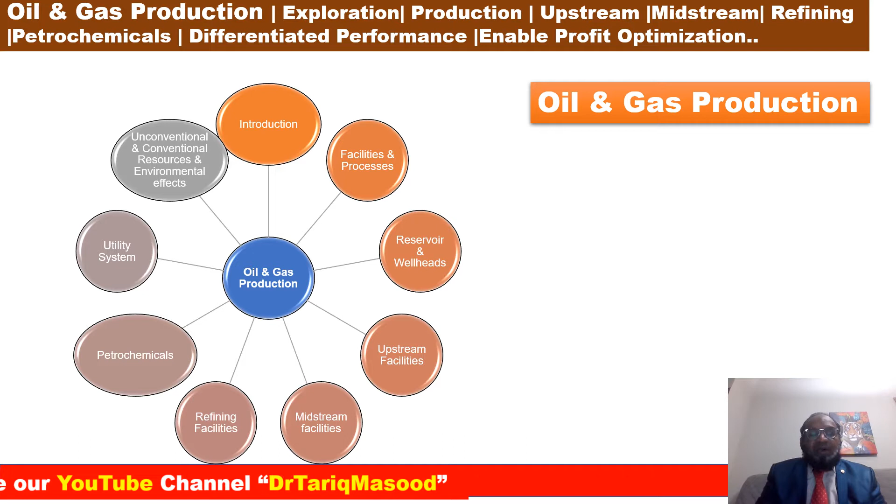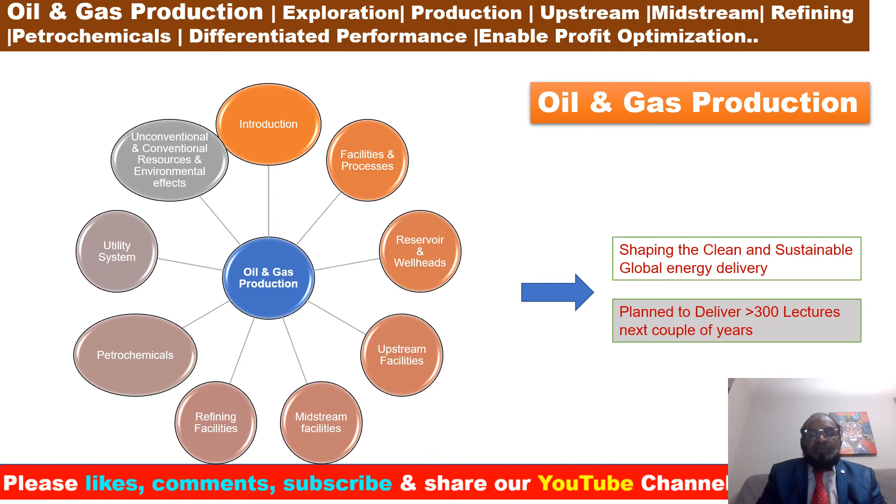Okay, oil and gas production. Introduction, we have already discussed. Facilities and processes management system, reservoir and wellhead management systems, upstream facilities and management systems, midstream facilities, refining facilities, petrochemicals, utility systems, unconventional, conventional resources and environment effects. What is the ultimate goal? Shaping the clean and sustainable global energy delivery. Plan to deliver more than 300 lectures next couple of years.

Okay, oil and gas production, utility systems, lecture number 34. What we're going to discuss today: ESD and PSD, emergency shutdown system and process shutdown system. Key takeaway points from lecture number 34: emergency and process shutdown system, fire and gas detection systems.

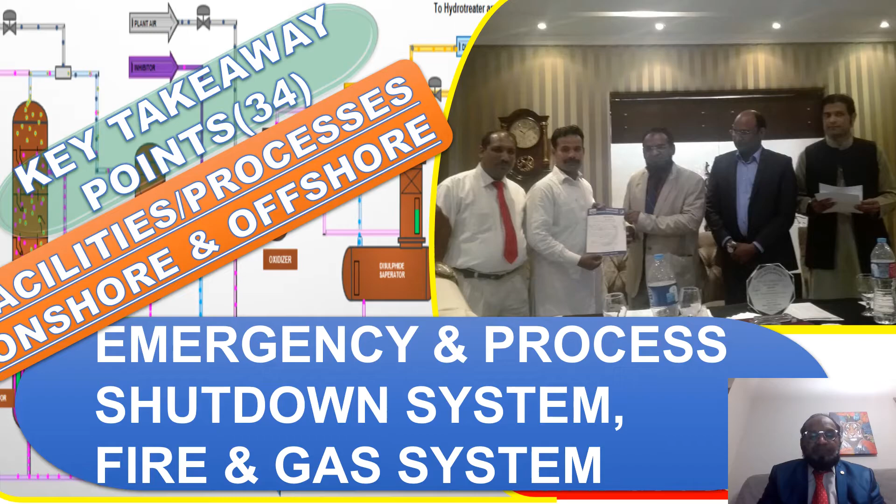Okay, ESD and PSD. The emergency shutdown and process shutdown systems will take action when the process goes into malfunction or a dangerous state. For this purpose, the system maintains four sets of limits for a process value: low low (LL), low (L), high (H) and high high (HH).

L and H are process warning limits, which alert to process disturbances. LL and HH are alarm conditions and detect that the process is operating out of range and there is a chance of undesired events and malfunctions. Separate transmitters are provided for the safety system.

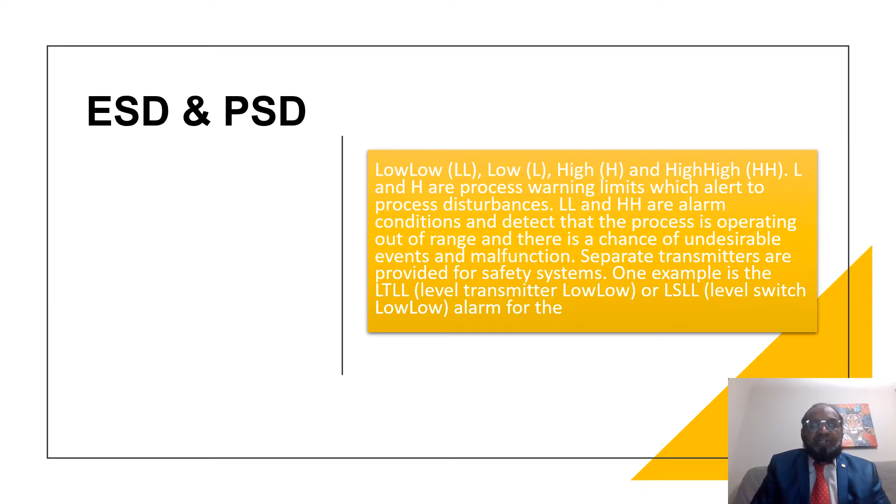One example is the LTLL, level transmitter low low, or LSLL, level switch low low alarm for the oil level. When this condition is triggered, there is a risk of blow-by, which means gas leaks out of the oil outlet and causes high pressure in the next separation stage or other following process equipment such as the desalter. Transmitters are preferred over switches because of better diagnostic capabilities.

Okay, emergency shutdown actions are defined in a cause and effect chart based on hazard study of the process. This study identifies possible malfunctions and how they should be handled. If you can see the schematic, we find possible shutdown actions. At oil and gas facilities, the primary response is to isolate and depressurize.

In this case, the typical action would be to close the inlet and outlet sectioning valves, that is EV015320, EV010820 and EV010220 in the diagram, as you can see in the schematic, and open the blowdown valve EV011420. This will isolate the malfunctioning unit and reduce pressure by flaring of the gas.

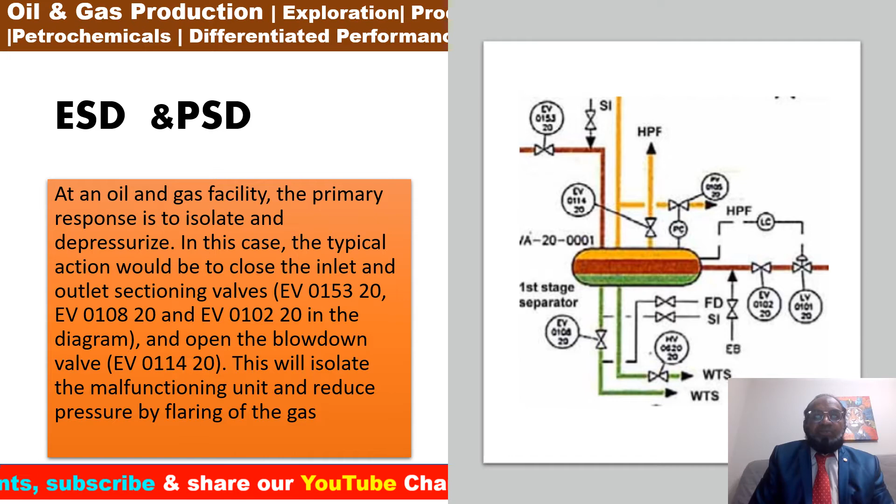Okay, ESD and PSD system. If you can see in the schematics or in the cause and effect chart, we have possible emergency responses. The events are classified on a scale from 0 to 5, where 0 is a full abandonment of the platform or facility shutdown. So ESD 0, as the highest level, means a complete shutdown and evacuation of the facility.

The next levels, ESD1 and ESD2, define emergency complete shutdown. The lower levels, for example PSD3, PSD4 and PSD5, represent a single equipment or process section shutdown.

A split between ESD and PSD is done in large installations because most signals are PSD, process shutdown, and can be handled with less strict requirements. These actions are handled by the emergency shutdown system ESD and process shutdown system PSD according to functional safety requirements and standards. Thus, typical ESD functions might require SIL 3 or even SIL 4 levels, while PSD loops could be SIL 2 or SIL 3.

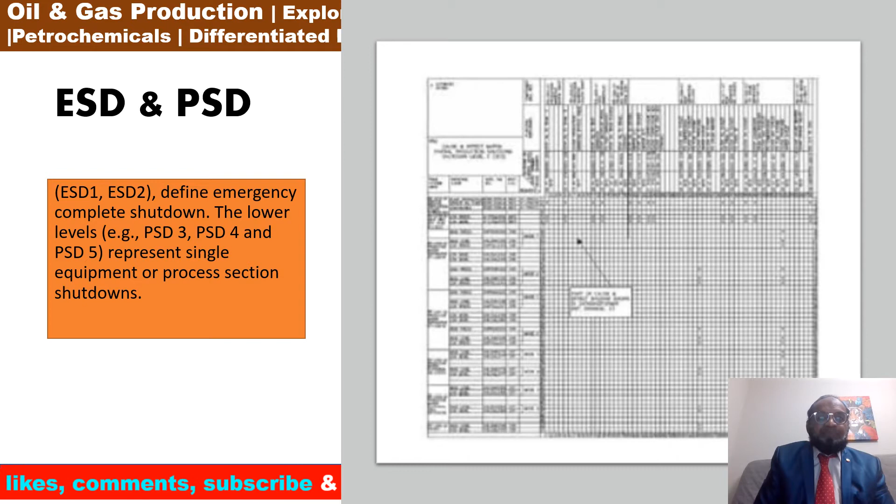Smaller ESD systems, for example on a wellhead platform, can be hydraulic or hardwired non-programmable systems. Fire and gas detection system. The fire and gas system is not generally related to any particular process. Instead, it divides into fire areas by geographical location. Each fire area should be designed to be self-contained in that it should detect fire and gas by several types of sensor and control fire protection and firefighting devices to contain and fight fire within the fire area.

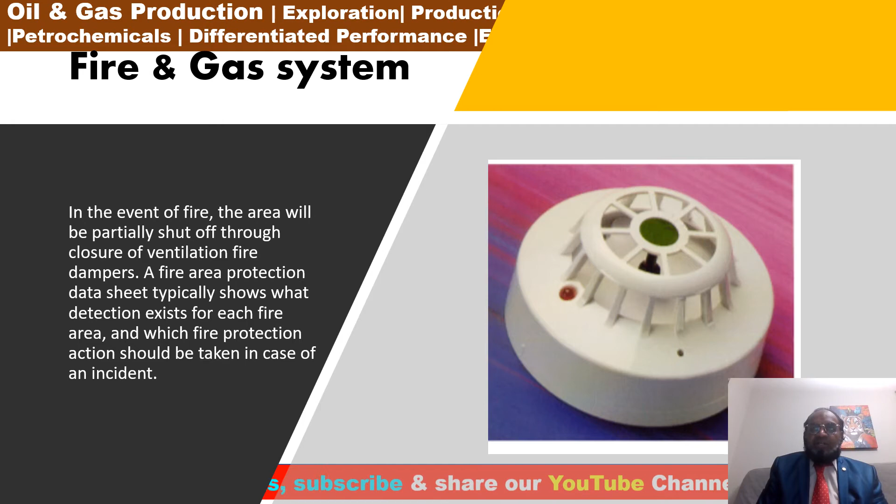In the event of fire, the area will be partially shut off through closure of ventilation fire dampers. A fire area protection data sheet typically shows what detection exists for each fire area and which fire protection action should be taken in case of an incident. The types and number of detection, protection and fighting devices depend on the type of equipment and size of the fire area and will vary for different process areas, for example electrical rooms and accommodation rooms, etc.

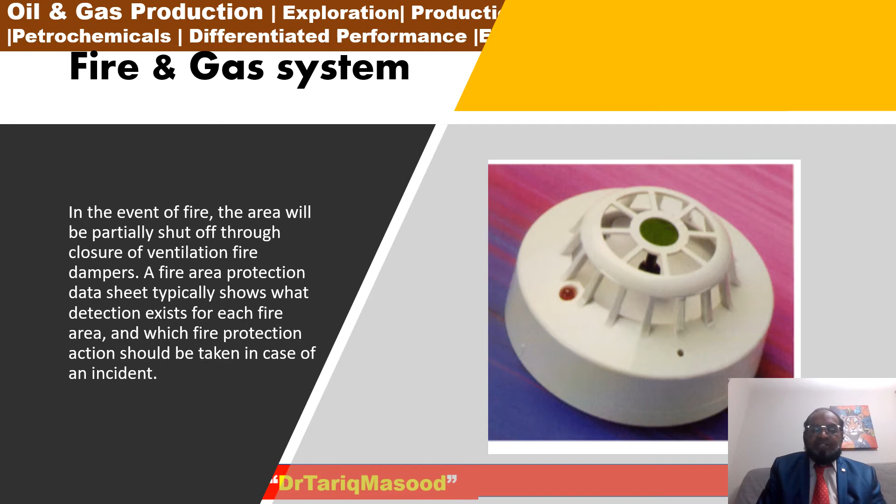From the next slide we will discuss the fire detection system. Fire and gas system. First, gas detection: combustible and toxic gas, electrocatalytic or optical IR detectors. Number 2, flame detectors: ultraviolet UV or infrared IR optical detectors are used. Fire detection: heat and ionic smoke detectors, and number 4, manual push buttons are used.

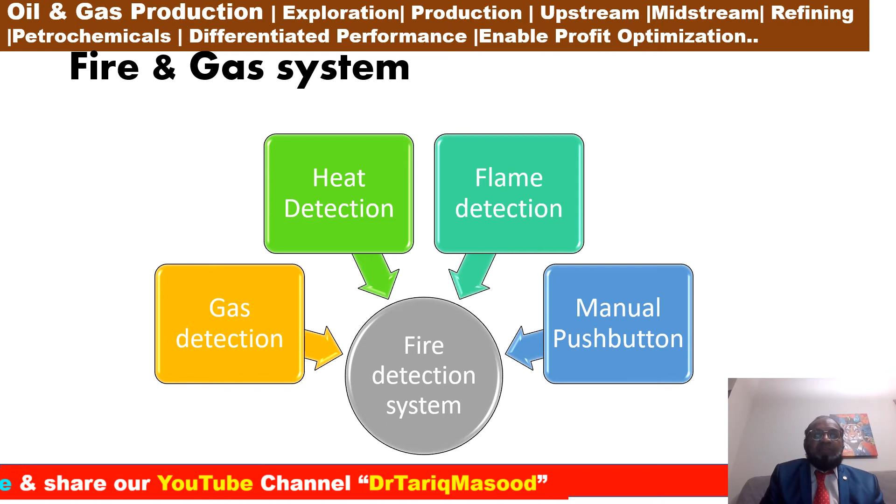Firefighting and protection system. First, gas-based firefighting such as CO2. Second is a foam-based firefighting system. Number 3, water-based firefighting system, for example sprinklers, mist, water supply, and deluge system. Number 4 is a protection interface to emergency shutdown and HVAC fire damping systems. Number 5, warning and escape: PA system, beacons, lights, fire doors, and damper releases.

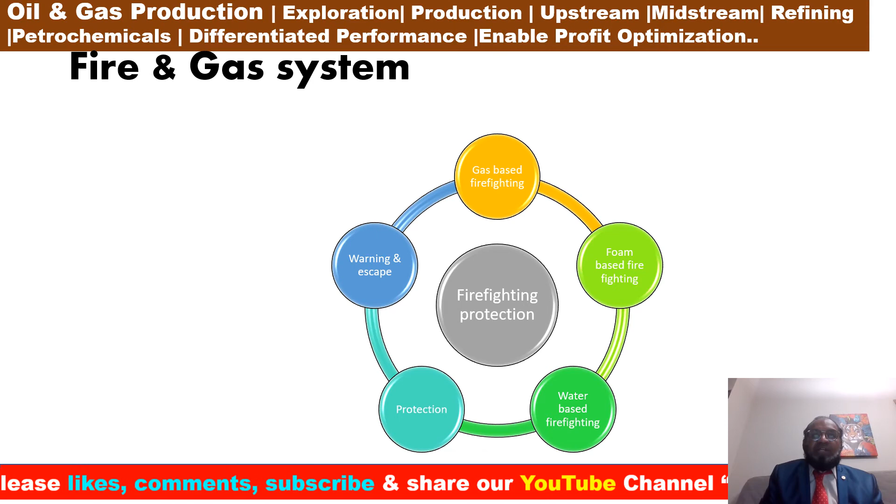Fire and gas system. A separate package related to fire and gas is the diesel or electrically driven fire water pumps for the sprinkler and deluge ring main. For fire detection, coincidence and logic are often used to identify false alarms. In such schemes, several detectors in the same area are required to detect a fire condition or gas leakage for automatic reaction. This will include different detection principles, for example, fire but not welding or lightning strike.

The F&G system often provides supervisory functions either in the F&G or in the information management system IMS to handle such tasks efficiently. For maintenance, calibration or replacement and hot work permits, for example welding, such actions may require that one or more fire and gas detectors or systems are overridden or bypassed. Specific work procedures should be enforced, such as placing fire guards on duty, to make sure all devices are re-enabled when the work permits expire or work is completed.

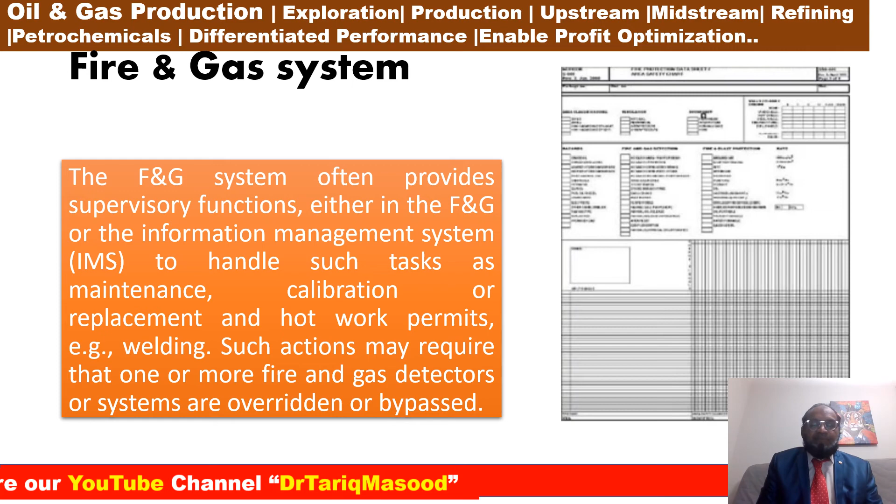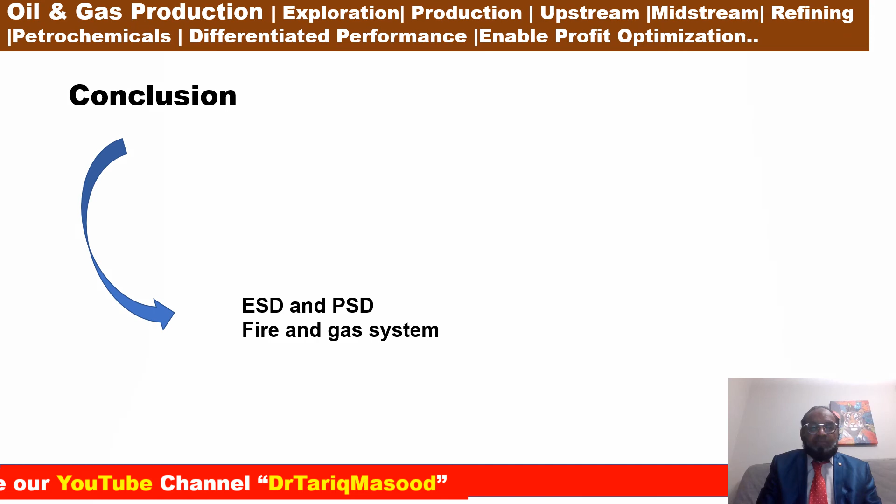Conclusion. Today we have discussed ESD and PSD systems, emergency shutdown system and process shutdown system, and the fire and gas system. Next topic, we are going to discuss control and safety configuration.